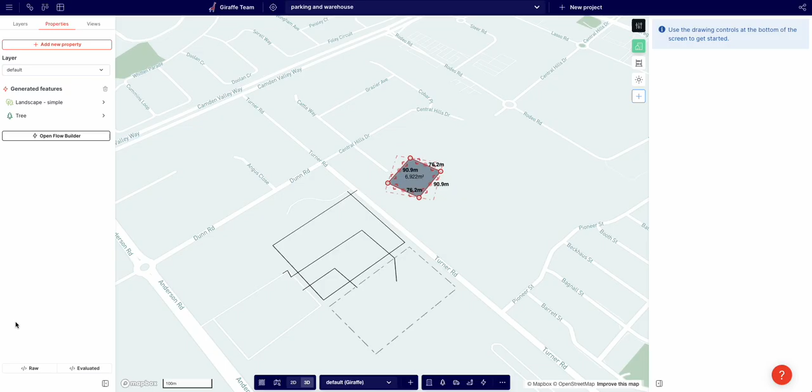Hey guys, in this video I want to show you the project flow editor. So in Giraffe we could draw a geometry and we can add a flow to it. And then if I add that flow, there it is.

This one's very simple. It just takes a square, makes it landscape, populates it with points, and then converts those points to trees. And that's how you get a little forest with a grass floor. Okay, so that's a flow attached to a geometry.

But we have this concept of a project flow. It's currently called the derivate editor, and it is experimental, but it sits up here. And I'm going to show you how it works. So it has access to every single geometry in the project. And there's a few cool features, new function blocks that I will show you. But first, we just need to set up some geometry.

So you can see here I'm drawing some lines. And if I come up to the derivate editor, you can see here are the lines that I've just drawn. Line string, line string, line string. They don't have a usage. They're just black line strings with these little IDs.

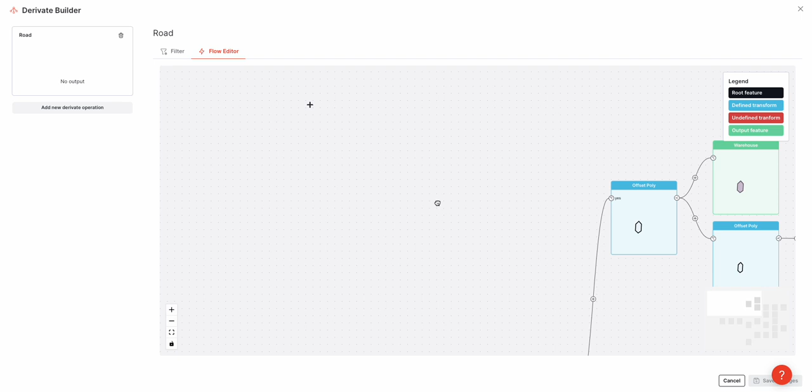And you can see there's a filter here. There's a boundary property, so a column heading called boundary, and it has to be 1. And currently there's nothing like that, so nothing's happening. So in the flow editor, nothing's happening, right? There's none being passed because nothing's arriving.

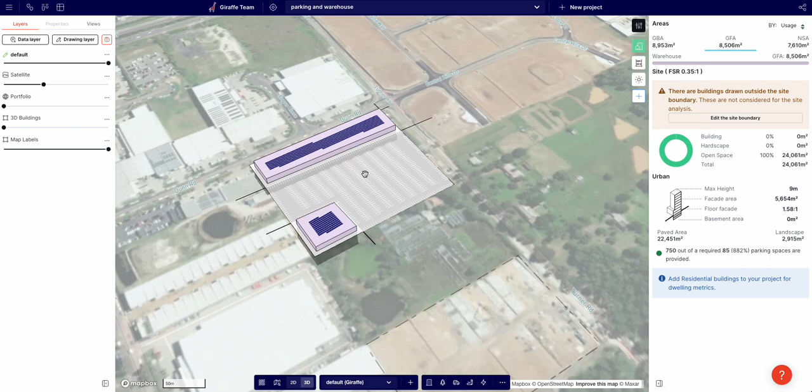So I'll hop into these geometries. I've selected them all, and I'm going to add boundary, set it to 1, the trailing comma, and hit save. And immediately something happens, right? A parking lot is generated and a building. And what's nice, what's more efficient with this flow is I'm just dragging one curve and I'm updating 2 geometries.

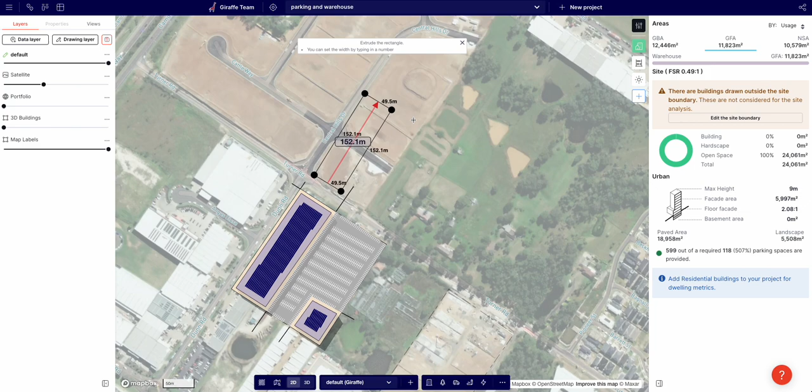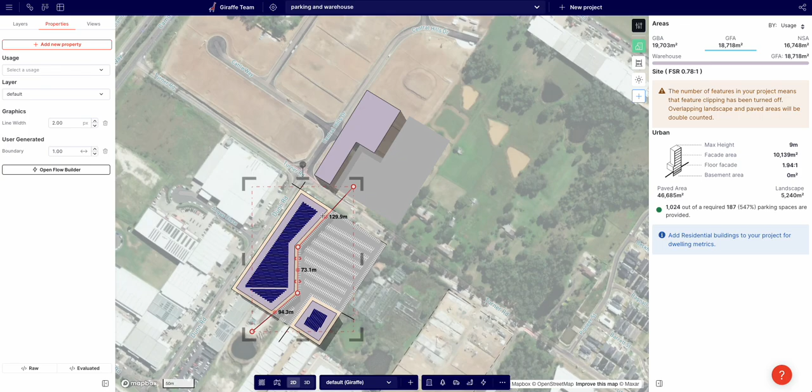So the traditional way of doing this would be to draw a warehouse like this, and then draw a car park like this. And then if you wanted to change that line, you go down 2, right? And if you wanted to grow it back or step it out, you'd have to go again. Whereas with this, everything's tied together kind of parametrically, right? So one move of the hand and everything updates, which is really cool.

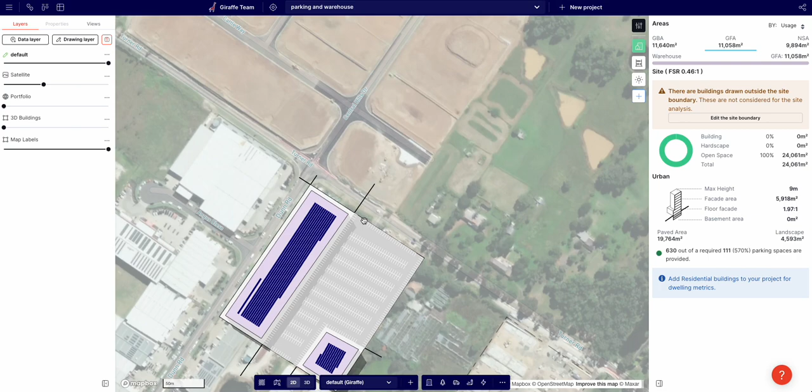Okay, so let's chase the data flow through. All right, so recalling, I selected all of the curves and I added this boundary and I set it to 1. And if I come to the project flow, which is called the derivate editor, you can see now I have a boundary property and it's set to 1. And this filter is saying tick, tick, tick, these 3 geometries are selected.

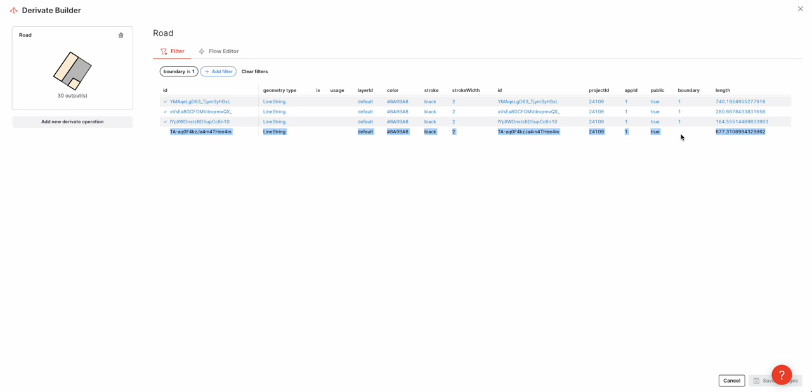If I add another geometry, there it is, but it doesn't have boundary set to 1. And we come back. There's this black geometry at the bottom. It doesn't have boundary set to 1, so it doesn't pass the filter, so it's not passed into the flow editor. All right, so these 3 curves are passed into the flow editor, and there's 2 more blocks that we've added to the flow editor.

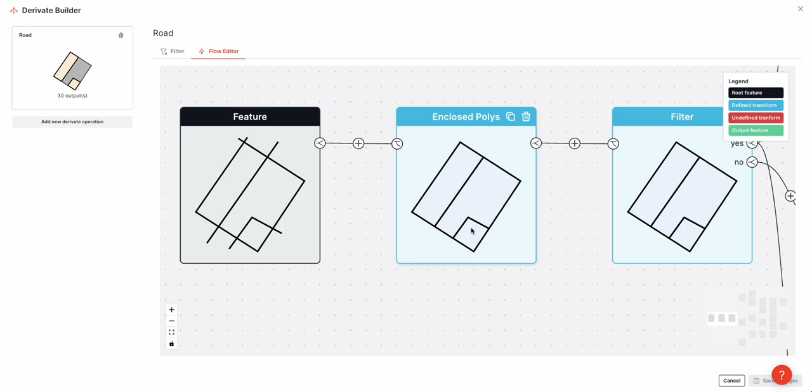The first is enclosed polys. What it does is it takes open line strings and it generates the internal closed polygons. So you can see this line here, this big outside and that stripe, they actually make that polygon and that polygon and that polygon. And so these are closed polygons. It's really cool. So from open line strings to closed polygons.

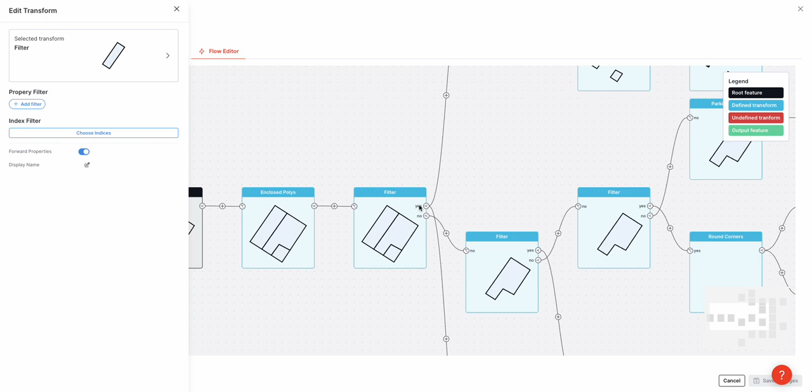And then we have a filter block. And the filter block filters in 2 ways. You can either add a property filter or you can use this index filter. And out passes the yes and the no, the true and the false. So things that pass the filter go yes, things that don't pass go into the no.

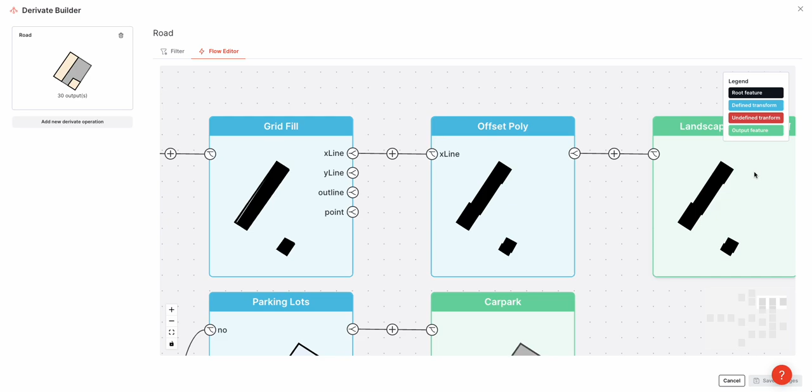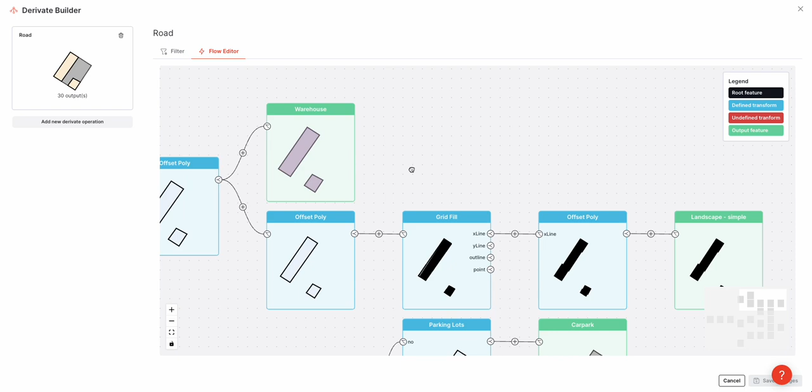And then there's sort of familiar blocks here. This is just offsetting, using the grid to create a series of lines internal to these polygons, offsetting them and making them dark blue landscape, which stack on the roof, and that represents the solar panels. And then we are insetting these things and calling them warehouse.

So for the yes, we want the warehouses to go. So I'm just going to choose this. Currently, index 0 and index 2, so that and that polygon are going up to the warehouse. So let's turn that one off. So we only have that as the warehouse. And then we're doing the filter again. So everything that fails the first filter comes to a second filter.

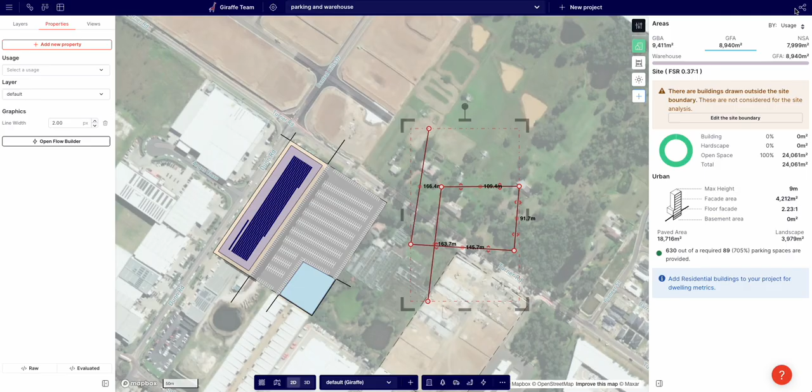And the idea here is that the things that pass this filter will become detention basin. The things that fail will go into a third filter. So let's pass this filter down. So this little guy becomes the detention basin. And then this guy becomes car park. So if I save now, we have what I want, which is a warehouse and a car park and a detention basin.

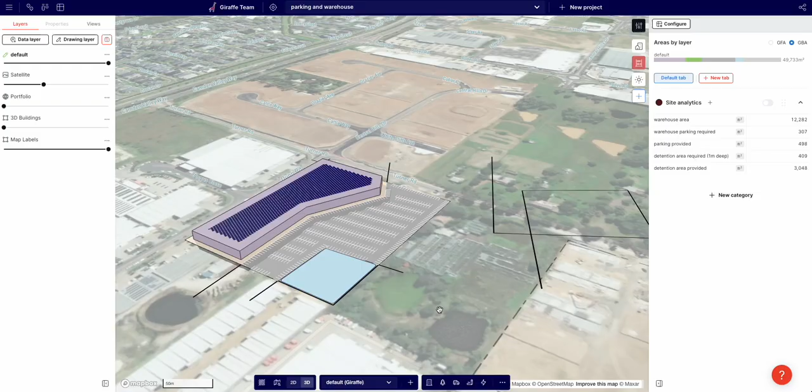Now, everything's hooked up to analytics. So the warehouse area, which is just this area over here, is 12,282, and that is the gross area. And if I draw a polygon, you should see it's about that amount.

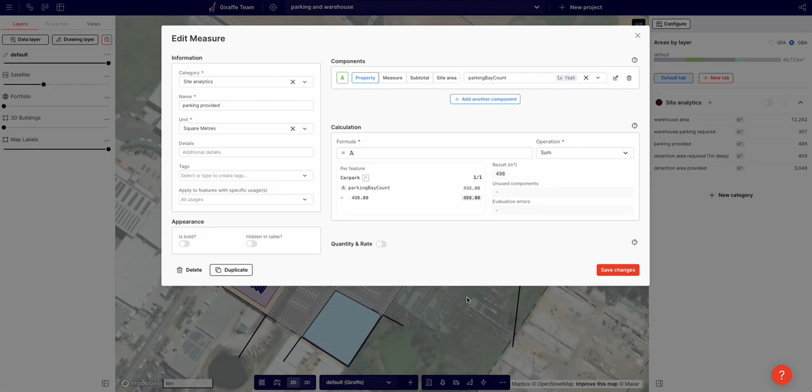Yes, that's 11,000, so that's about right. And the warehouse parking required is equal to that area, so that 12,282 divided by 40, so one park for every 40 square meters, which means there's 307 car parks required. And then the parking provided is just the total count of the number of parks. As you can see, that's 498. So we've got too many car parks right now.

And this is where it gets really fun doing this, because what you can do is stretch this out and change both numbers at once. So you can see as I grow the warehouse, the amount of parking required is going up and the amount of parking provided is going down because I'm shrinking the car park and growing the warehouse at once. And you can see this is sort of how a lot of generative design works. You do this and then you get the computer to move this line across, right, until those two numbers match. Currently, I'm just eyeballing it. And hopefully that will solve it at some point.

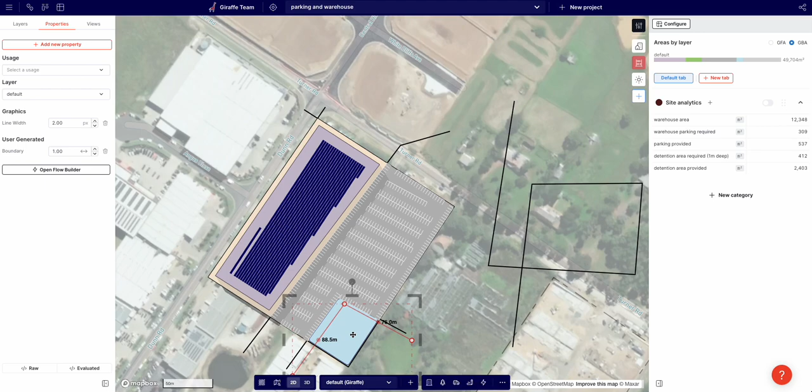And then I'm doing the same thing with the detention pond. So for every 30 square meters of roof, you need some detention, and this thing's 1 meter deep, because obviously detention is measured in volume, right?

Okay, so let's do one last thing, just to show you some of the limitations and the complexities here. I'm going to try and model up this little scheme over here. All right, so first thing I'll do is get a line. I just quickly whip it around the edge. And then I'm going to set this up like this. And I'm putting those little danglers at the end just so I can extrude those boys. I'll set up another line here. And why not one more?

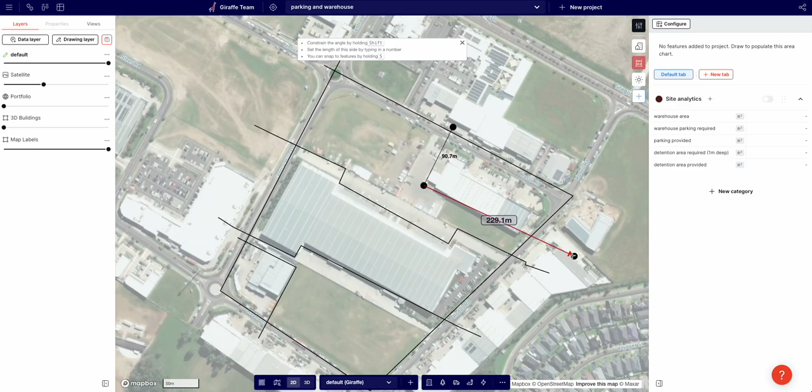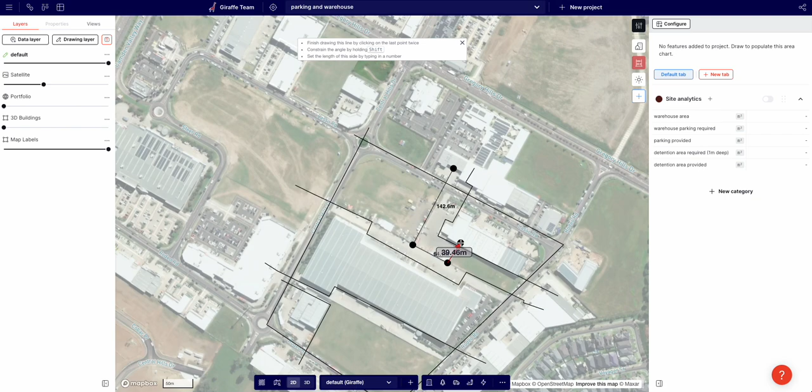And a final one. Okay, so now what I'm going to do is select all those lines that I've just created. How accurate should we be? Let's be fully accurate, or at least one degree more accurate than this. Okay, let's see how this goes. So I'm going to grab all of those lines. There's 6 of them, and I'm going to add that property, boundary equals 1, and they shall be passed into the project flow. All right, boom, bang, bang.

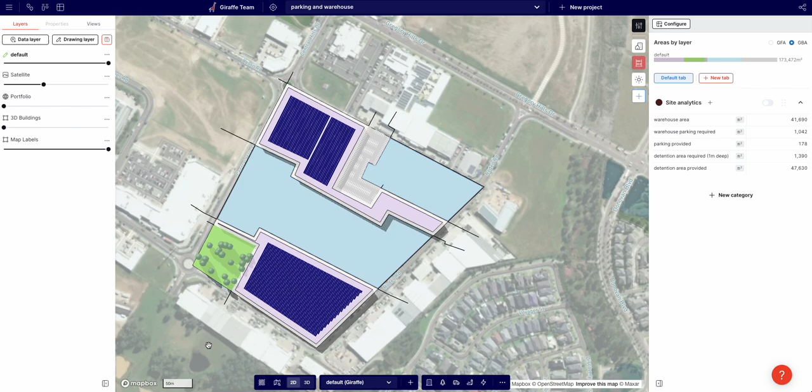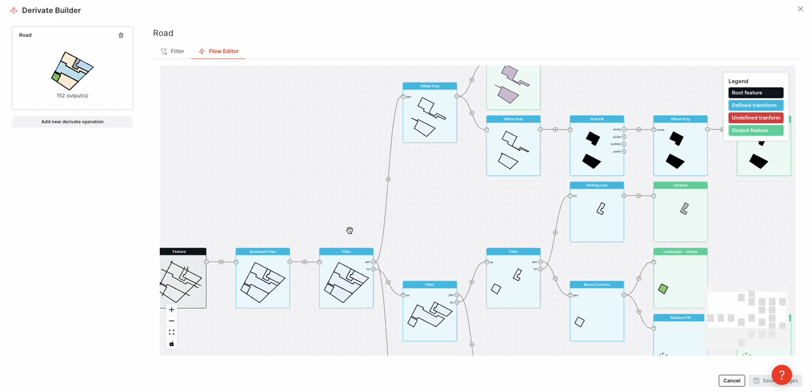All right, something happens. Now you can see everything's mixed up. The building is being turned into a park, and the park's being turned into a building, and that's because those filters aren't set up correctly. So let's go and just set them up. So we get into the derivate builder. You can see all of the geometries are coming through. And here we go. Now, the first thing is this first filter, which passes the bits up; whatever comes out of yes gets turned into a building.

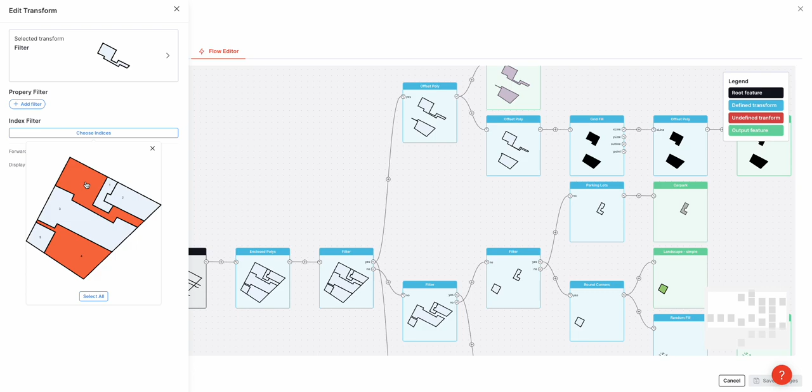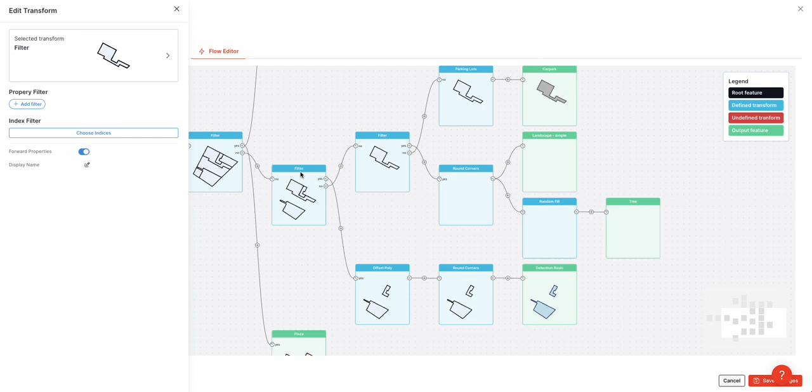So we want 5, we want 3, and we want 2 to be passed as buildings. That's right. Okay. Now, the next filter here is the thing that is... I'm just going to save because I didn't draw a detention pond. Well, there's actually no detention basin in this instance. All right, so the thing that's true here gets to be a detention basin. So we're going to say nothing's going to be true. It's all going to go up here.

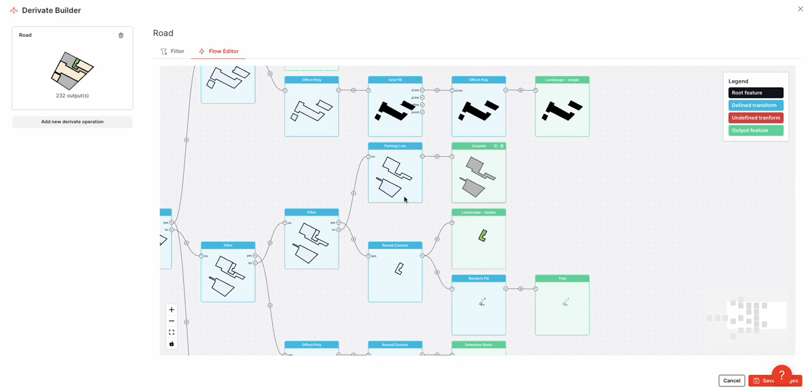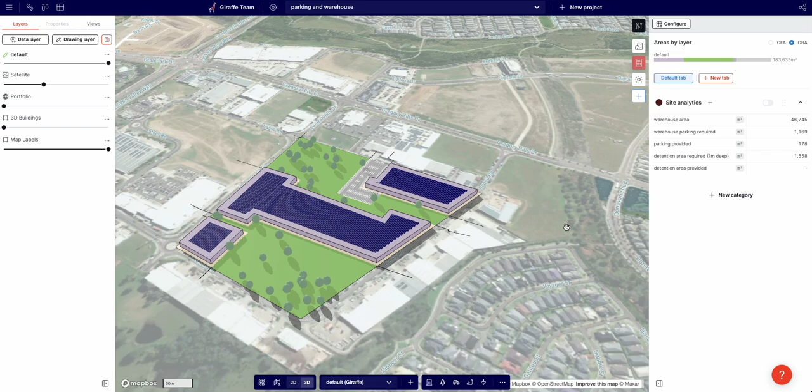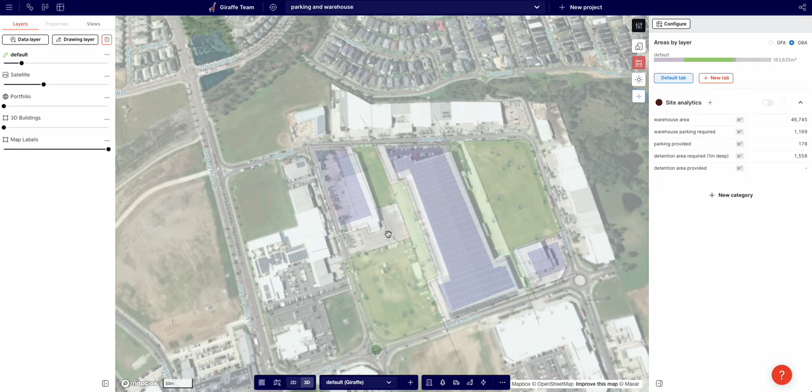And now the thing that is true becomes landscape, and the thing that's false becomes car park. So it's the opposite of this. Those are the landscape, and that's the car park. Right, there will be a more intuitive way of doing this, but you can sort of see. Okay, so there we go. Got these 2 big landscaped areas, got these 3 big buildings, and we've got this nice little industrial estate. And if we turn it down, you see we're more or less right.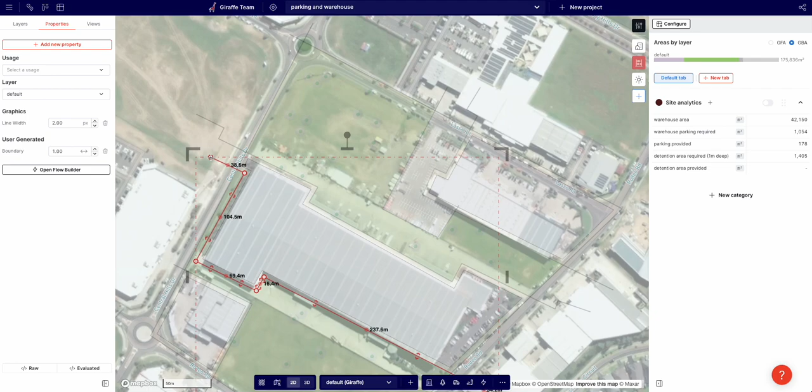There's this building, and now I can do that efficient editing where I'm just pulling this and I'm editing. It's a little confusing editing because I've got a few setbacks in the flow. So my line gets set back an additional meter. So it's a little confusing, but you can sort of imagine, if you set this up properly, how this can work. You can see also here, you would want to be pulling this back ever so slightly, like this. There you go. Cool. All right, let's just turn that back up.

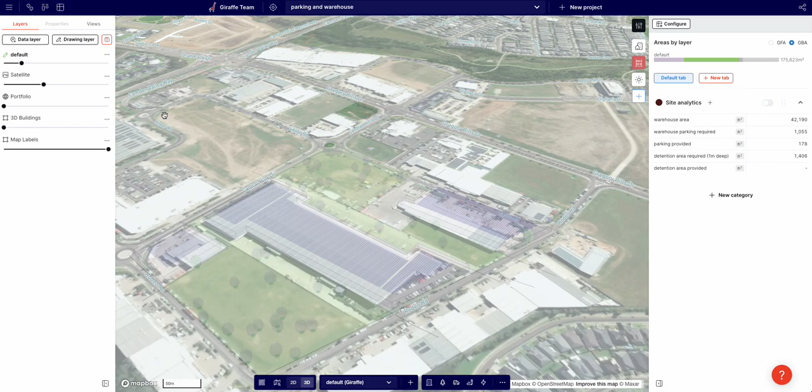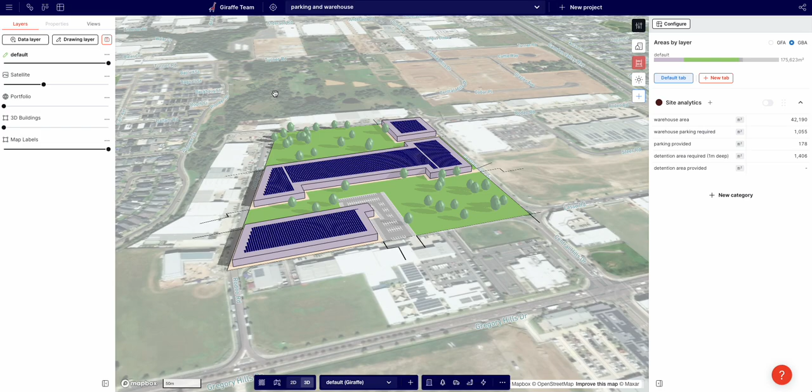Okay, so it's quite a long video, but hopefully you can sort of see, I guess, the power of this, why you might use it. This kind of line-based design can be very powerful, can be very nice, can also be very annoying. So it's not going to be fit for every purpose. But I'll follow up with a few more videos that show you how you can use some other modeling techniques to massively accelerate stuff. And I would emphasize this is beta, so tread lightly. Things will change. The UI will be improved rapidly over the next couple of weeks.